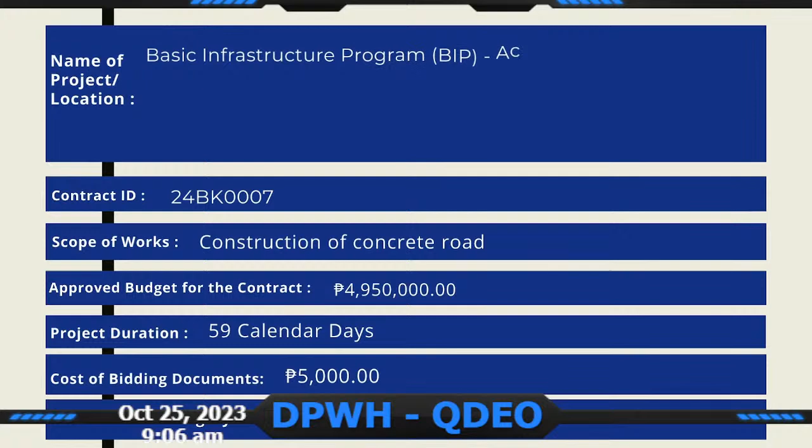Second project is BIP, construction of Nagabgaban Road, Barangay Nagabgaban, Aglipay, Quirino. Contract ID 24BK0007. Scope of works: construction of concrete road. Approved budget for the contract: 4,950,000 pesos. Project duration: 59 calendar days. Cost of bidding documents: 5,000 pesos. PCAB license category C&D, size range Small B.

Third project is BIP, construction of Macate Road, Barangay Macate, Diffun, Quirino. Contract ID 24BK0008. Scope of works: construction of concrete road. Approved budget for the contract: 4,950,000 pesos. Project duration: 64 calendar days. Cost of bidding documents: 5,000 pesos. PCAB license category C&D, size range Small B.

Fourth project is BIP construction of Del Pilar Road, Barangay Del Pilar, Cabarroguis, Quirino. Contract ID 24BK0009. Scope of works: construction of concrete road. Approved budget for the contract: 4,950,000 pesos. Contract duration: 78 calendar days. Cost of bidding documents: 5,000 pesos. PCAB license category C&D, size range Small B.

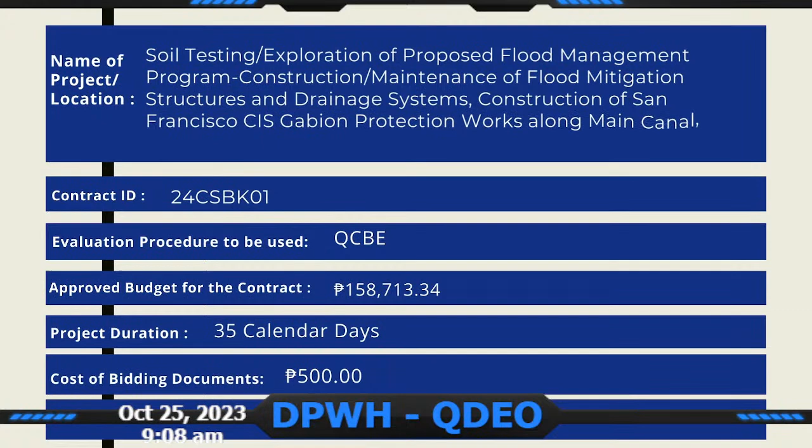First consulting services is soil testing exploration of proposed flood management program, construction maintenance of flood mitigation structures and drainage systems, construction of San Francisco CIS gabion protection works along Main Canal, San Francisco, Aglipay, Quirino. Contract ID 24CSBK01. Evaluation procedure to be used: QCBE. Approved budget for the contract: 158,713 pesos and 34 centavos.

Project duration: 35 calendar days. Cost of bidding documents: 500 pesos. Passing score for the technical evaluation: 80 points.

Second project is soil testing and exploration of the proposed flood management program: construction and rehabilitation of flood mitigation facilities within major river basins and principal rivers, specifically construction of Cagayan River flood control, Manglad section, Manglad, Maddela, Quirino. Contract ID 24CSBK02. Evaluation procedure: QCBE. Approved budget for the contract: 158,713 pesos and 34 centavos. Project duration: 35 calendar days. Cost of bidding documents: 500 pesos. Passing score for the technical evaluation: 80 points.

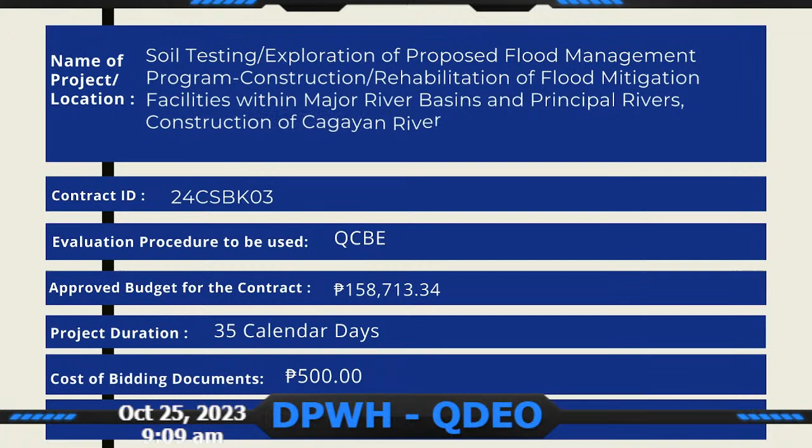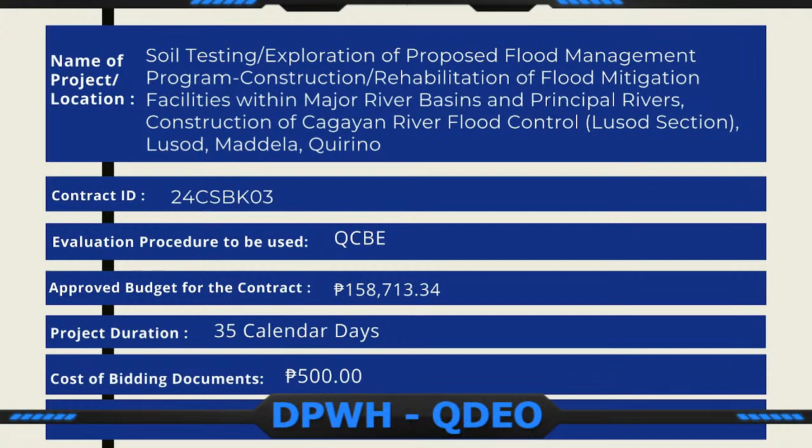Third project is soil testing and exploration of the proposed flood management program: construction and rehabilitation of flood mitigation facilities within major river basins and principal rivers, specifically construction of Cagayan River flood control, Lusod section, Lusod, Maddela, Quirino. Contract ID 24CSBK03. Evaluation procedure: QCBE. Approved budget for the contract: 158,713 pesos and 34 centavos. Project duration: 35 calendar days. Cost of bidding documents: 500 pesos. Passing score for the technical evaluation: 80 points.

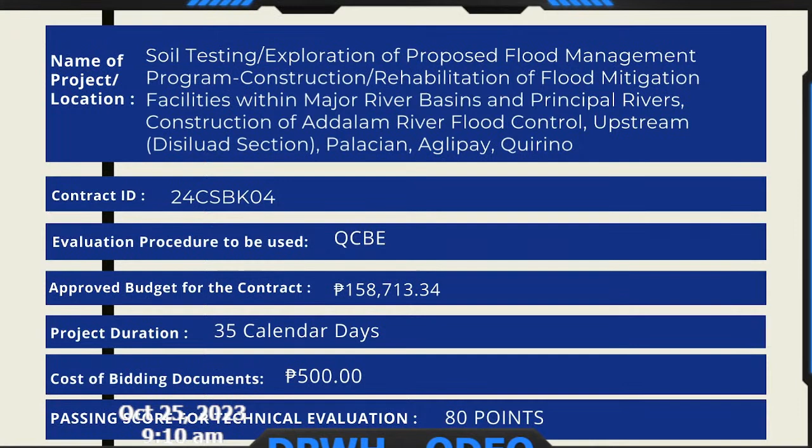Fourth project is soil testing exploration of the proposed flood management program, construction and rehabilitation of flood mitigation facilities within major river basins and principal rivers: construction of Addalam River flood control, upstream, Disiluad section, Palacian, Aglipay, Quirino. Contract ID 24CSBK04. Evaluation procedure: QCBE. Approved budget for the contract: 158,713 pesos and 34 centavos. Project duration: 35 calendar days. Cost of bidding documents: 500 pesos. Passing score for the technical evaluation: 80 points.

Fifth project is soil testing exploration of the proposed flood management program, construction and rehabilitation of flood mitigation facilities within major river basins and principal rivers: construction of Addalam River flood control downstream, Pinaripad Sur, Aglipay, Quirino. Contract ID 24CSBK05. Evaluation procedure: QCBE. Approved budget for the contract: 158,713 pesos and 34 centavos. Project duration: 35 calendar days. Cost of bidding documents: 500 pesos. Passing score for the technical evaluation: 80 points.

Sixth project is soil testing exploration of the proposed flood management program, construction and rehabilitation of flood mitigation facilities within major river basins and principal rivers: construction of Addalam River flood control downstream, Disiluad section, Palacian, Aglipay, Quirino. Contract ID 24CSBK06. Evaluation procedure: QCBE. Approved budget for the contract: 158,713 pesos and 34 centavos. Project duration: 35 calendar days. Cost of bidding documents: 500 pesos. Passing score for the technical evaluation: 80 points.

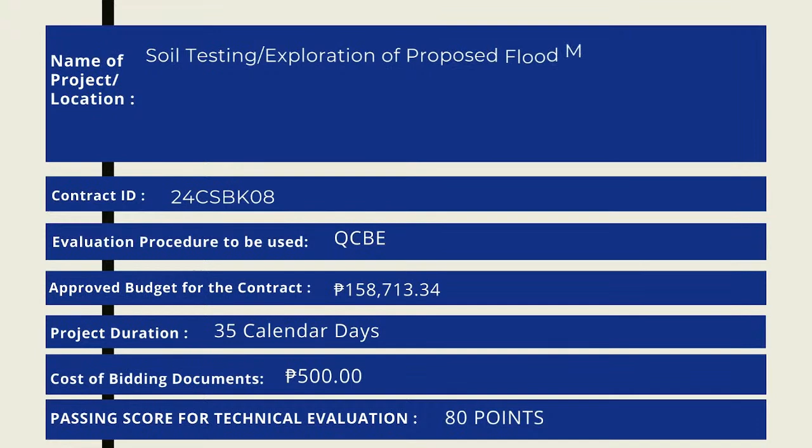Eighth project is soil testing exploration of the proposed flood management program, construction and rehabilitation of flood mitigation facilities within major river basins and principal rivers: construction along Cagayan River, Sangbay River, Sangbay, Maddela, Quirino. Contract ID 24CSBK08. Evaluation procedure: QCBE. Approved budget for the contract: 158,713 pesos and 34 centavos. Project duration: 35 calendar days. Cost of bidding documents: 500 pesos. Passing score for the technical evaluation: 80 points.

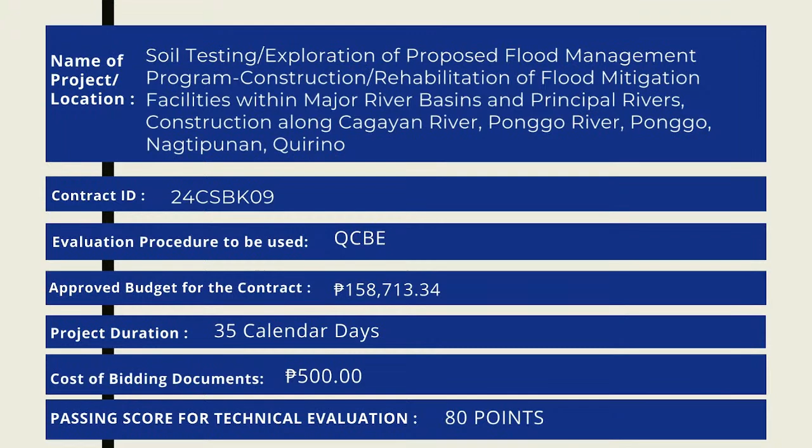Next project is soil testing exploration of the proposed flood management program, construction and rehabilitation of flood mitigation facilities within major river basins and principal rivers: construction along Cagayan River, Ponggo, Nagtipunan, Quirino. Contract ID 24CSBK09. Evaluation procedure: QCBE. Approved budget for the contract: 158,713 pesos and 34 centavos. Project duration: 35 calendar days. Cost of bidding documents: 500 pesos. Passing score for the technical evaluation: 80 points.

Last project is soil testing exploration of the proposed flood management program, construction and rehabilitation of flood mitigation facilities within major river basins and principal rivers: construction of Nalungtutan River control downstream along Cagayan River, San Dioniso II, Nagtipunan, Quirino. Contract ID 24CSBK10. Evaluation procedure: QCBE. Approved budget for the contract: 158,713 pesos and 34 centavos. Project duration: 35 calendar days. Cost of bidding documents: 500 pesos. Passing score for the technical evaluation: 80 points.

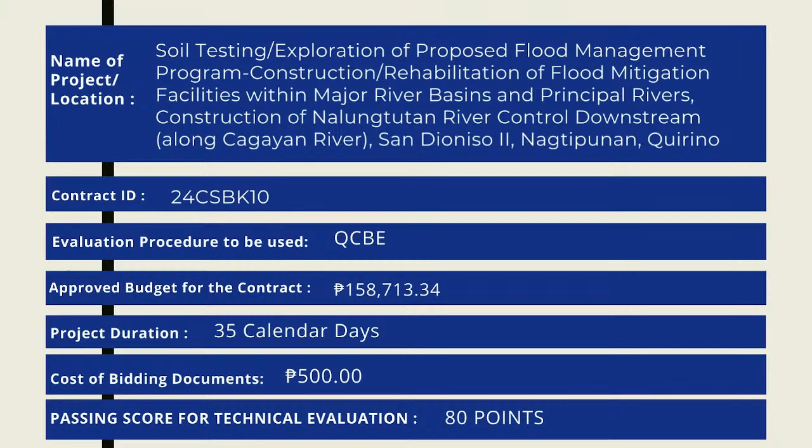This pre-bid conference is to discuss, clarify, and explain, among other things, the eligibility requirements and the technical and financial components of the contract to be bid, including questions and clarifications raised by prospective bidders before and during the conference. It is conducted not earlier than 7 calendar days from the posting of the invitation to bid, and at least 12 calendar days before the deadline of submission of bids.

A supplemental or bid bulletin is issued to answer questions or requests for clarification or interpretation, and upon the BAC's initiative to clarify or modify any provisions of the bidding documents. It is posted on the PhilGEPS and DPWH websites and on our bulletin board at least 7 calendar days before the deadline of bid submission. It is the duty of prospective bidders to always check the websites for any issued bulletins.

In the receipt and opening of bids, bids submitted should be on the date and time, and either at its physical address or through online submission as specified in the advertisement, through a single stage two-envelope system. Bids should be valid for a period not exceeding 120 calendar days from the date of the opening of bids.

The first envelope must contain the eligibility requirements and the technical component, and the second envelope must contain the financial component. In the sealing and marking of bids, enclose the original eligibility and technical documents in one sealed envelope marked original technical component, and the other original financial component in another sealed envelope marked original financial component.

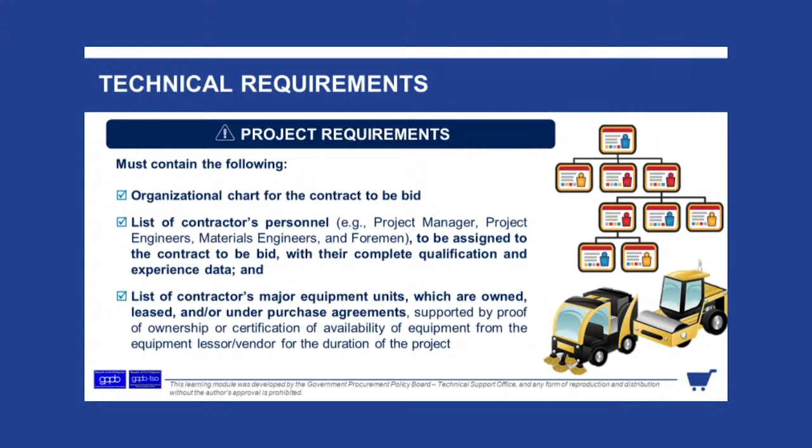For the revised Omnibus Sworn Statement form, Statement number 3 was revised and Statement number 10 was added, which states that in case advance payment was made or given, failure to perform or deliver any of the obligations and undertakings in the contract shall be sufficient ground to constitute criminal liability for swindling or the commission of fraud with unfaithfulness or abuse of confidence through misappropriating or converting any payment received by a person or entity under an obligation involving the duty to deliver certain goods or services, to the prejudice of the public and the government of the Philippines, pursuant to Article 315 of Act Number 3815, Series of 1930, as amended, or the Revised Penal Code.

For the contents of the second envelope, first is the financial bid form, including bid prices and bill of quantities, as well as applicable price schedules and other documents required in the bidding documents.

In the detailed evaluation of bids, its purpose is to determine the lowest calculated bid by establishing correct calculated prices of bids and ranking calculated total bid prices from lowest to highest. A non-discretionary criterion shall be used, which shall include consideration of completeness of bids and minor arithmetical corrections. Results shall be contained in the abstract of bids as calculated.

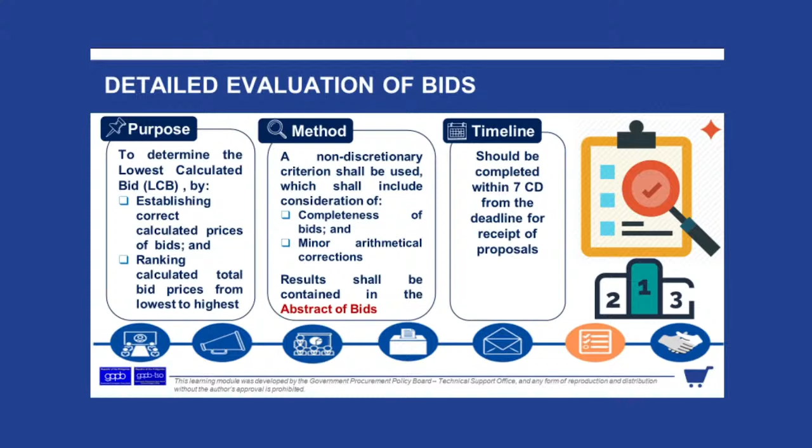Placing no price is considered as non-responsive, while specifying a zero or dash means it is offered for free.

In case of discrepancies: bid price in figures versus bid price in words, bid price in words shall prevail. Total price per item versus unit price for the item multiplied by its quantity, the latter shall prevail. Stated total price versus the actual sum of prices of component items, the latter shall prevail. Unit cost in the detailed estimate versus unit cost in the bill of quantities, the former shall prevail. No-contact rule means prohibition on communication with bidders from bid evaluation until award of the contract.

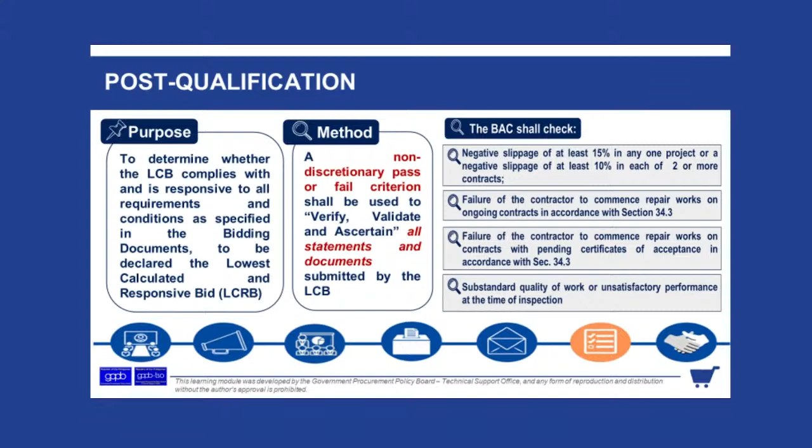In the conduct of post-qualification, its purpose is to determine whether the lowest calculated bid complies with and is responsive to all requirements and conditions as specified in the bidding documents, to be declared the lowest calculated and responsive bid. A non-discretionary pass or fail criterion shall be used to verify, validate, and ascertain all statements and documents submitted by the lowest calculated bid.

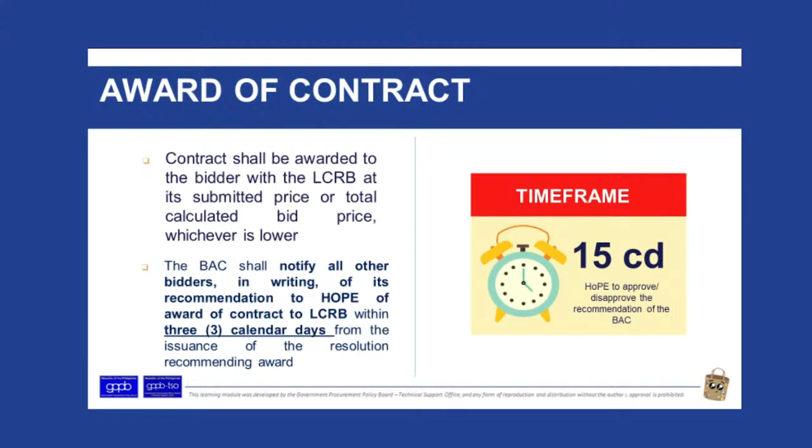For the award of contract, it shall be awarded to the bidder with the lowest calculated responsive bid, at its submitted price or total calculated bid price, whichever is lower. The BAC shall notify all other bidders of its recommendation to the Head of Procuring Entity for award of contract to the LCRB within 3 calendar days from the issuance of the resolution recommending award. The Head of Procuring Entity shall have at most 15 calendar days to decide whether or not to approve or disapprove said recommendation.

For consulting services, the same procedure will be done. Only the financial envelope of bidders who were rated pass in their technical evaluation will be opened.

For the contents of the technical and financial proposals: the first envelope, or the technical proposal, must contain the technical proposal submission form, bid security, description of organization and outline of recent experience, list of ongoing and completed projects under government or private contracts, comments and suggestions on the terms of reference, approach, work plan and schedule, organizational chart of key and support staff indicating their tasks, list of key personnel with their curriculum vitae, time schedule, work plan, and the Omnibus Sworn Statement.

For the financial proposal, it must contain the financial proposal submission form, summary of cost, breakdown of price per activity, breakdown of remuneration per activity, reimbursable per activity, and other items as may be required in the bidding documents.

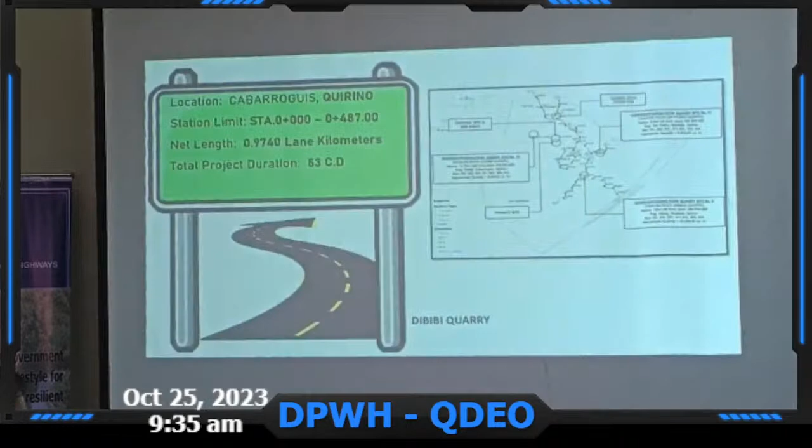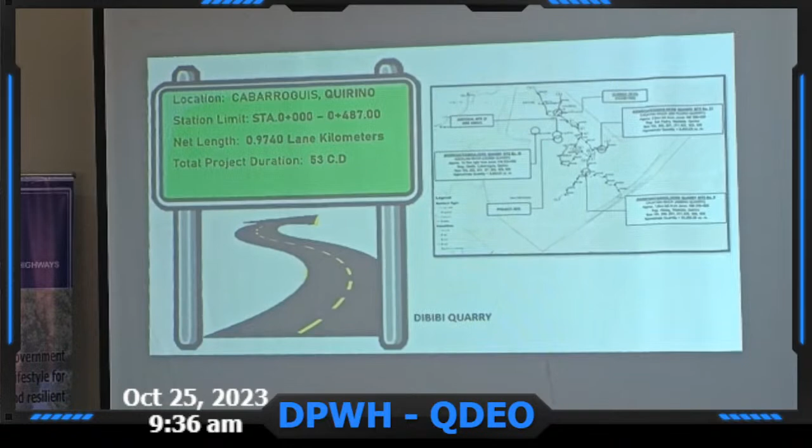Part B, project billboard signboard, for each. Occupational safety and health program, lump sum. The materials involved: safety helmet, safety shoes, safety vest, working gloves, face mask, rubber boots, eye goggles, and raincoats. For traffic management, lump sum. Mobilization, demobilization, lump sum. For the traffic management materials, it is advisable to use retro-reflective materials.

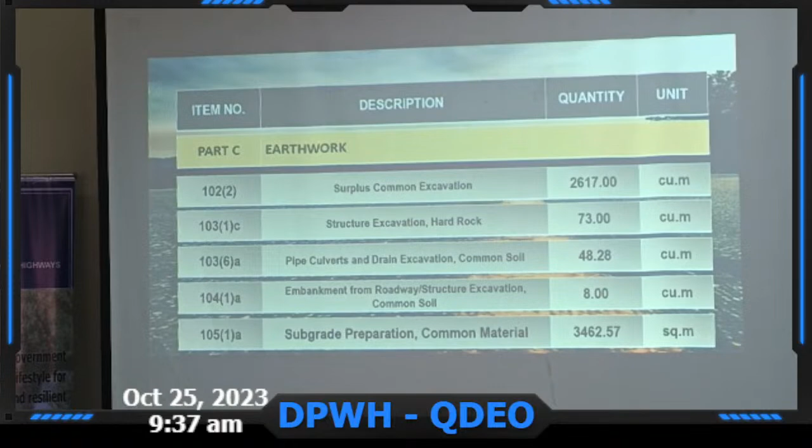For Part C, surplus common excavation, 2,617 cubic meter. For structure excavation, hard rock, 73 cubic meter. Pipe culverts and drain excavation, common soil, 48.28 cubic meter. Embankment from roadway, structure excavation, common soil, 8 cubic meter.

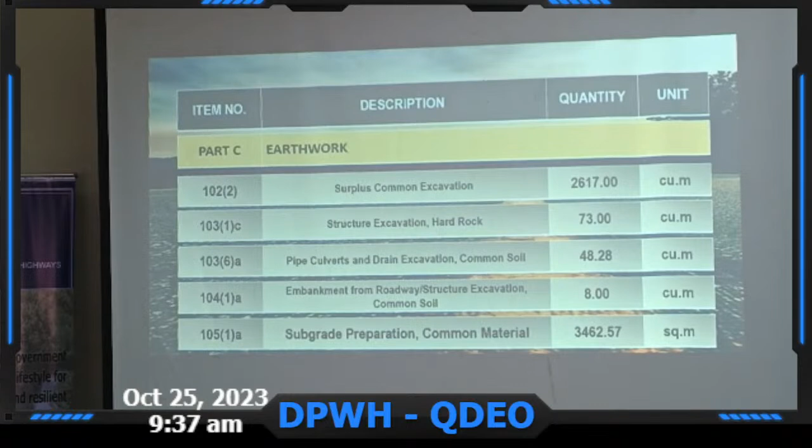Subgrade preparation, common material, 3,462.57 square meter. Part D, aggregate sub-base course, 497 cubic meter. For Part E, Portland cement concrete pavement, unreinforced, 0.23 meters thick at 14 days, 2,435 square meters.

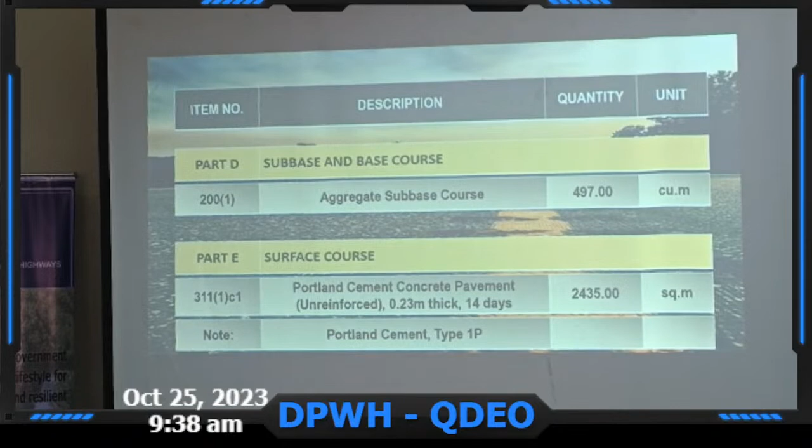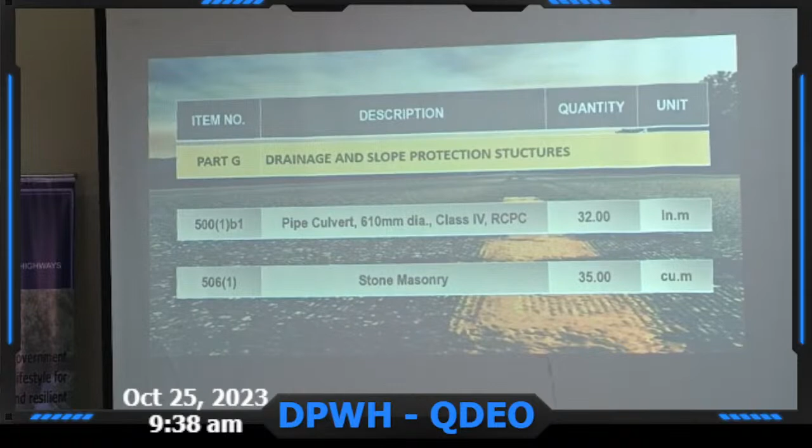The cement to be used is Portland cement type 1P for the PCCP. For Part G, pipe culvert 610 diameter, class 4 RCPC, 32 linear meter, and stone masonry of 35 cubic meters. That's all for the items for Dingasan.

Are there any questions?

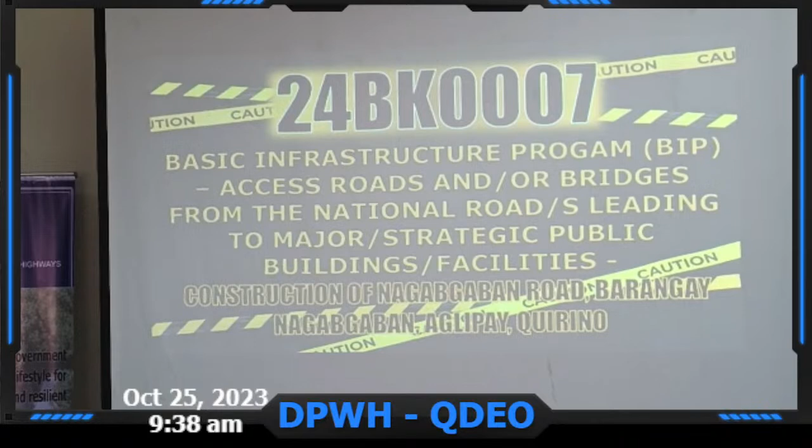Let's proceed to our next project, also a BIP, construction of Nagabgaban Road, Barangay Nagabgaban, Aglipay, Quirino, with a length of 400 meters, 59 calendar days.

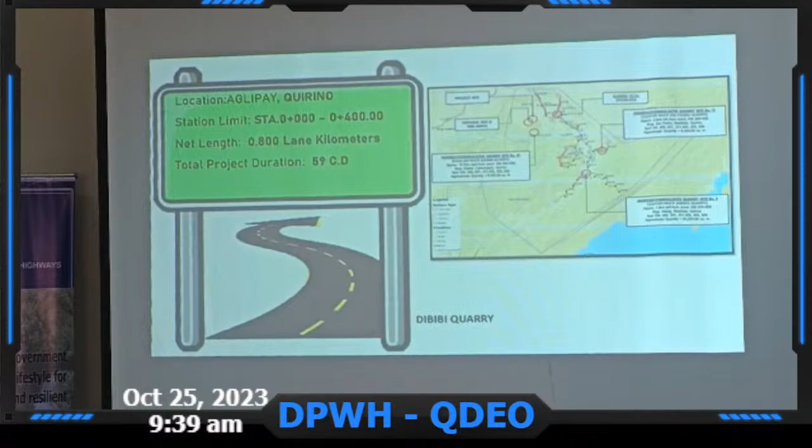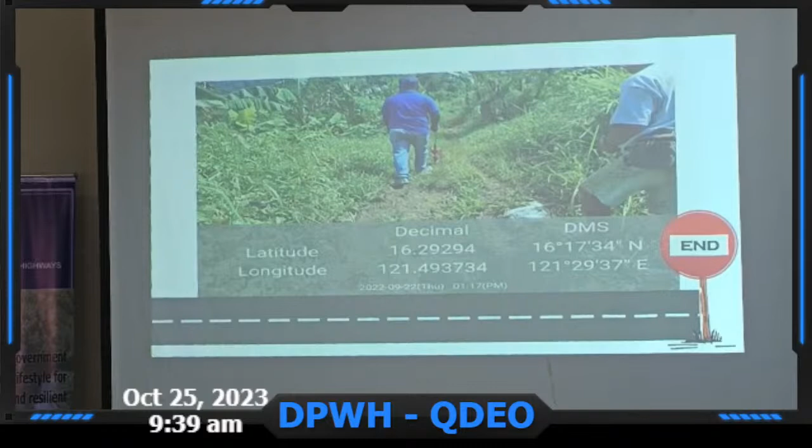Photos taken at the site, beginning of the project, end of project. For items and quantities involved, Part A, provision of progress photographs, 1.97 months.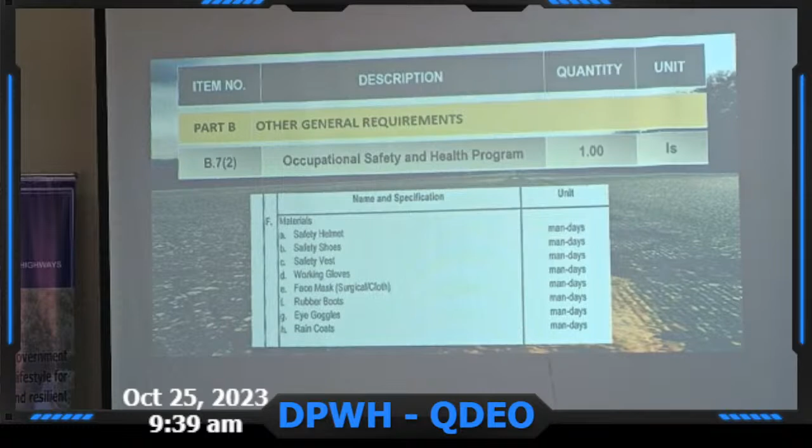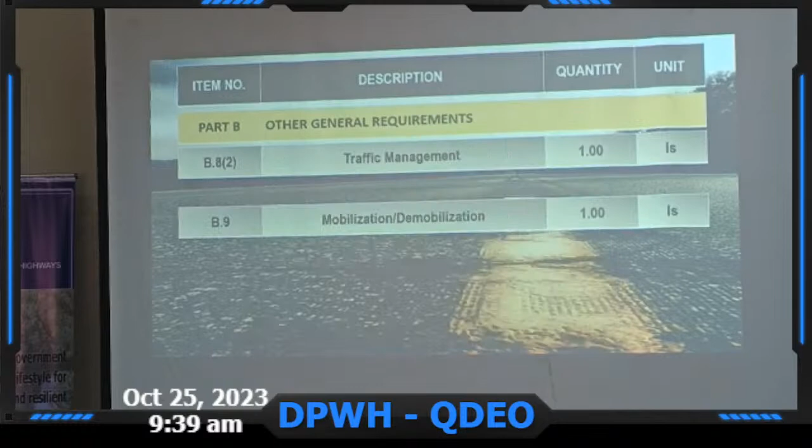Part B, project billboard, signboard, for each. Occupational safety and health program. For the materials: safety helmets, safety shoes, safety vests, working gloves, face masks, rubber boots, eye goggles, and raincoats. Traffic management, lump sum. Mobilization, demobilization, lump sum. For traffic management, materials to be used are retro-reflective, especially for the signages.

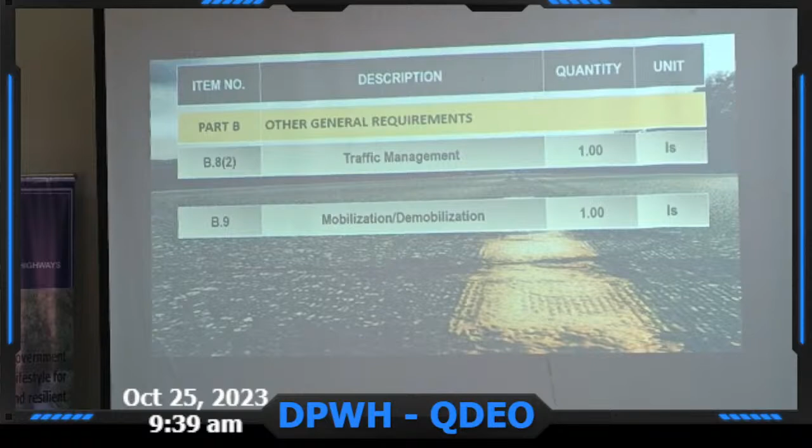For Part C, surplus common excavation, 1,520 cubic meter. Surplus rock excavation, soft, 196 cubic meter. Embankment from roadway, structure excavation, common soil, 78 cubic meter. Subgrade preparation, common material, 2,924 square meter. Part D, aggregate sub-base course, 408 cubic meter.

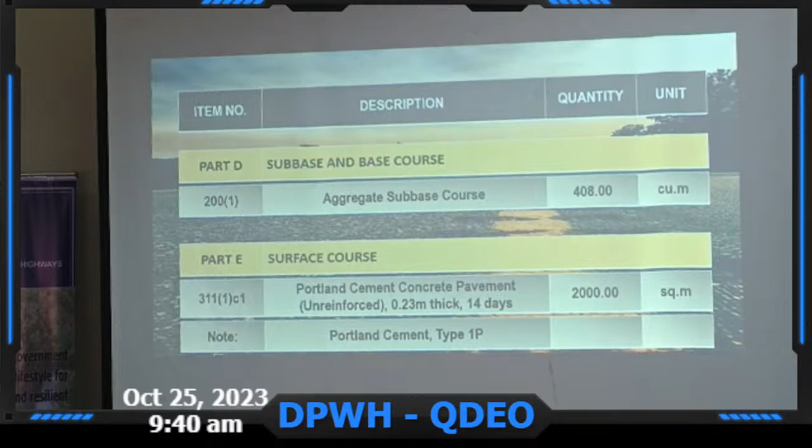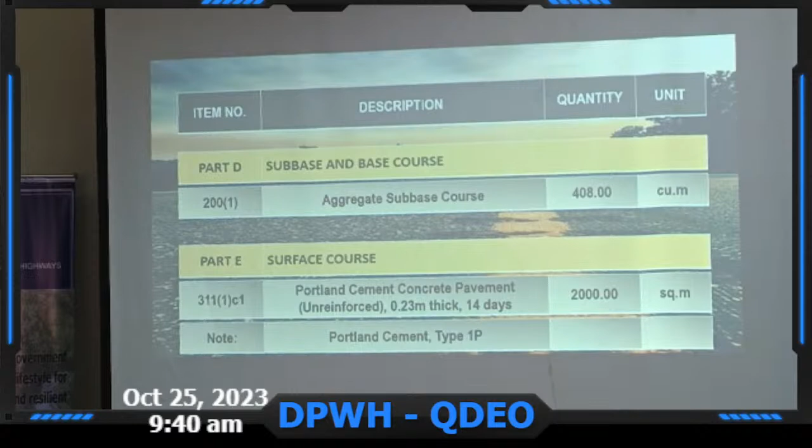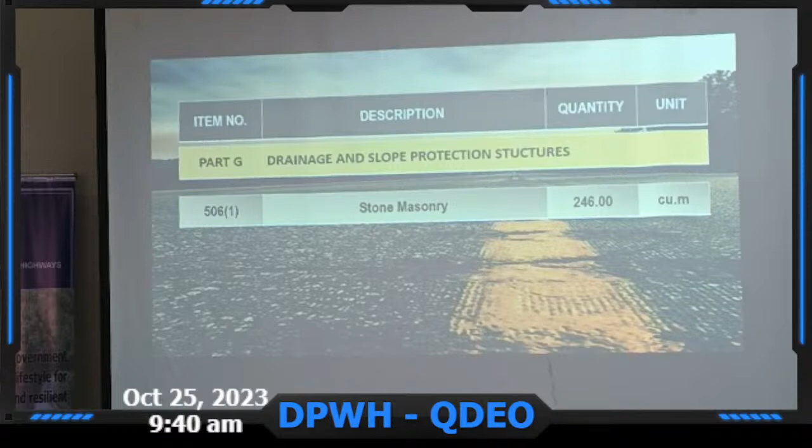For Part E, Portland cement concrete pavement, unreinforced, 0.23 meters thick at 14 days, 2,000 square meter. The cement to be used is Portland cement type 1P for the PCCP. For Part G, stone masonry of 246 cubic meter. These are all the items involved in the project of Nagabgaban.

Are there any questions concerning that project? Okay, let's proceed.

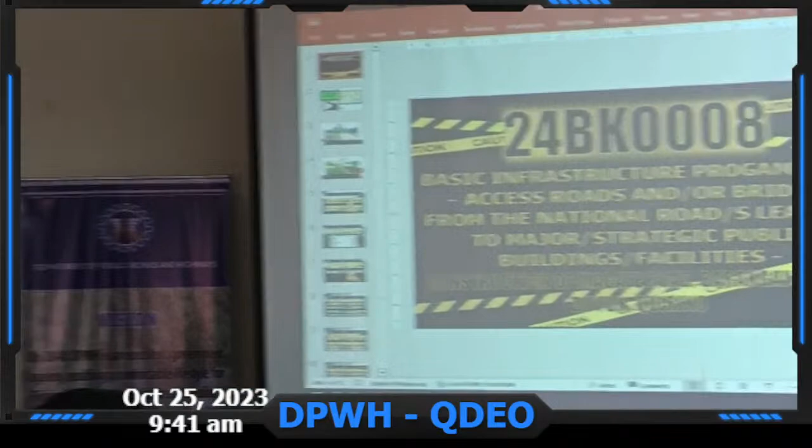For our next project, also a BIP, construction of Macate Road, Barangay Macate, Diffun, Quirino, with a total length of 259.5 meters, 64 calendar days.

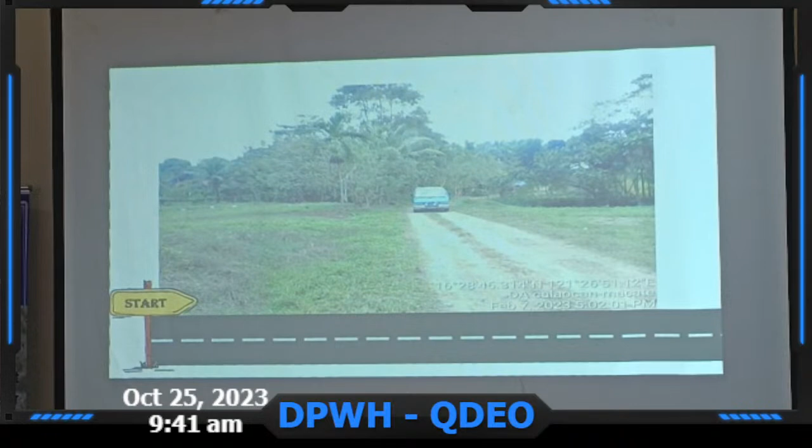Photos taken at the site, the start of the project, and end of the project. For items and quantities involved, Part A, provision of progress photographs, 2.13 months. Part B, project billboard signboard for each.

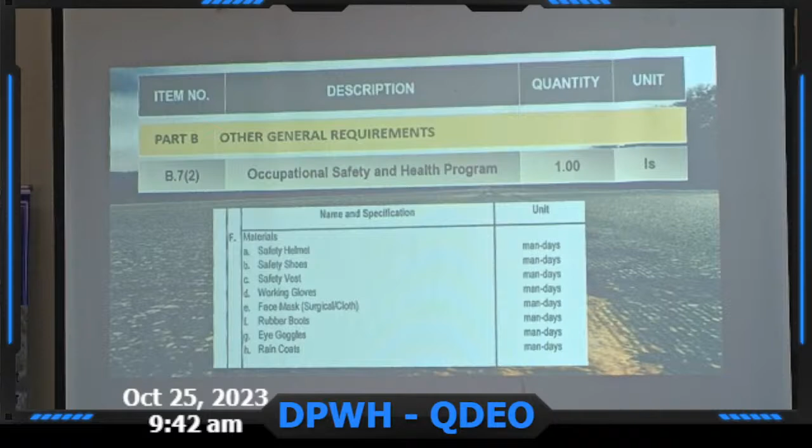Occupational safety and health program, 1 lump sum. For materials: safety helmet, safety shoes, safety vest, working gloves, face mask, rubber boots, eye goggles, and raincoats. Traffic management, lump sum, demobilization, lump sum. Also for traffic management, use retro-reflective material for the signages.

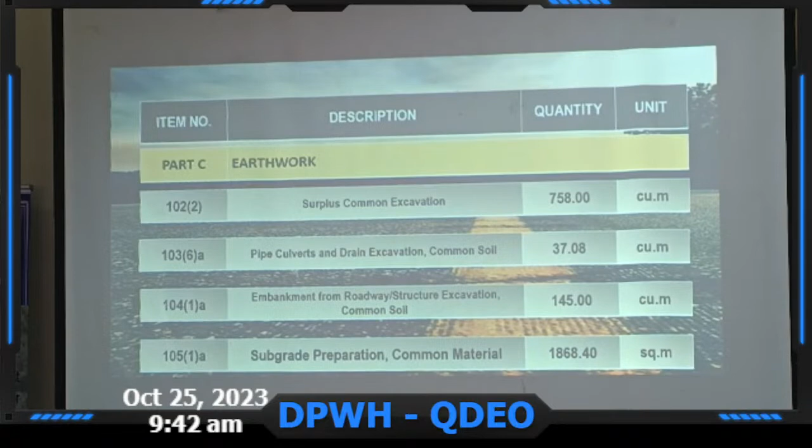For Part C, surplus common excavation, 758 cubic meter. Pipe culverts and drain excavation, common soil, 37.08 cubic meter. Embankment from roadway, structure excavation, common soil, 145 cubic meter. Subgrade preparation, common material, 1,868.4 square meter. For Part D, aggregate sub-base course, 457 cubic meter.

For Part E, surface course, Portland cement concrete pavement, unreinforced, 0.23 meters thick at 14 days, 1,297.5 square meter. The type of cement to be used is Portland cement type 1P for the PCCP.

For Part G, pipe culvert, 610 diameter, class 4 RCPC, 16 linear meter. And pipe culvert of 910 diameter, class 4 RCPC, 3 linear meter. We have a lined canal of stone masonry, 33 cubic meter, and stone masonry of slope protection, 283 cubic meter. This is all the items and quantities involved in the project of Macate.

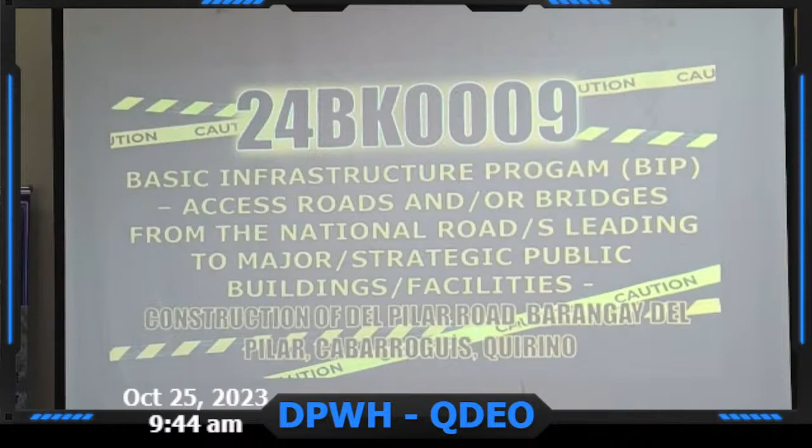For the last project for the roads, it's also a BIP, construction of Del Pilar Road, Barangay Del Pilar, Cabarroguis, Quirino, with a length of 352.9 meters, 78 calendar days.

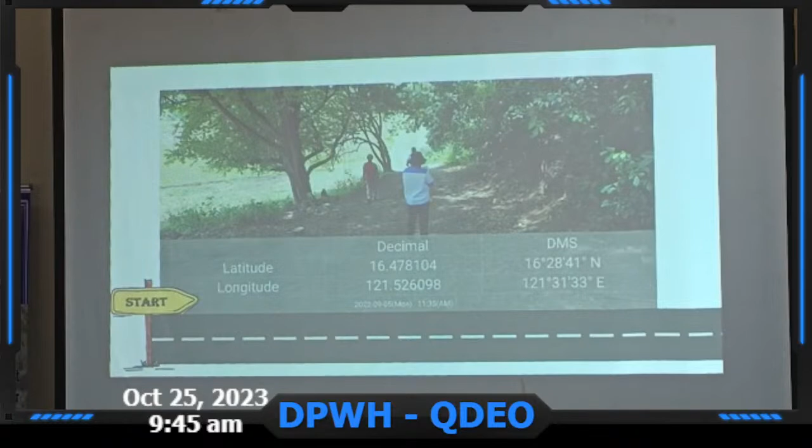Photos taken at the site, the beginning of the project, and end of the project. For the items and quantities involved, for Part A, provision of progress photographs, 2.6 months.

Part B, project billboard, signboard for each. Occupational safety and health program, lump sum. The materials are safety helmet, safety shoes, safety vest, working gloves, face mask, rubber boots, eye goggles, and raincoats.

For the traffic management, lump sum, mobilization, demobilization, lump sum. For the traffic management, use retro-reflective materials for the signages.

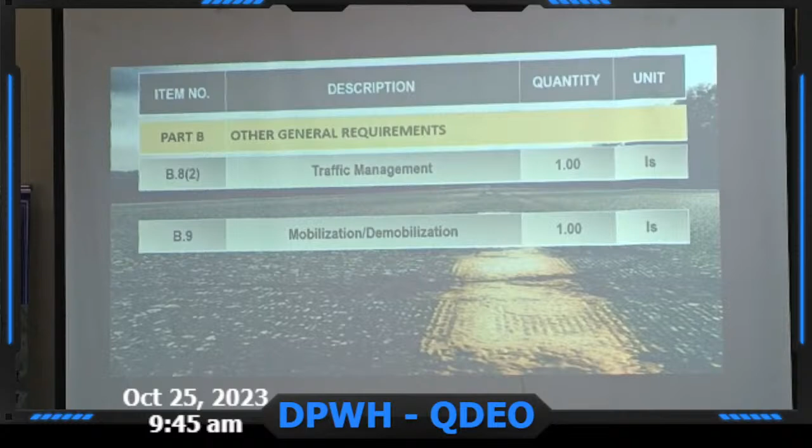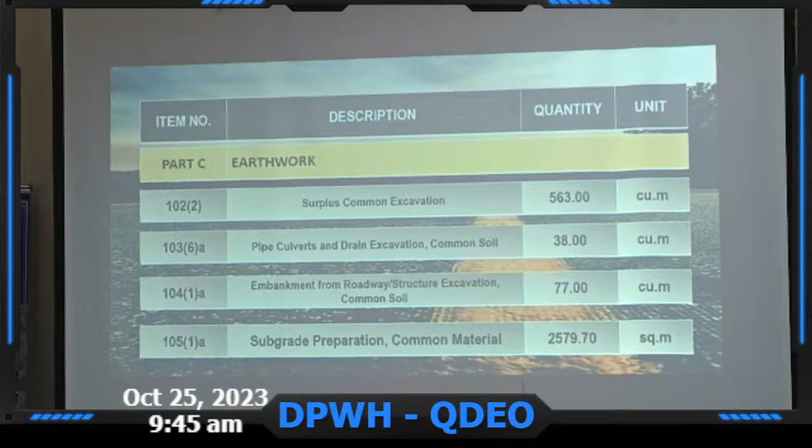For part C, surplus common excavation, 563 cubic meter. Pipe culverts and drain excavation, common soil, 38 cubic meter. Embankment from roadway, structure excavation, common soil, 77 cubic meter.

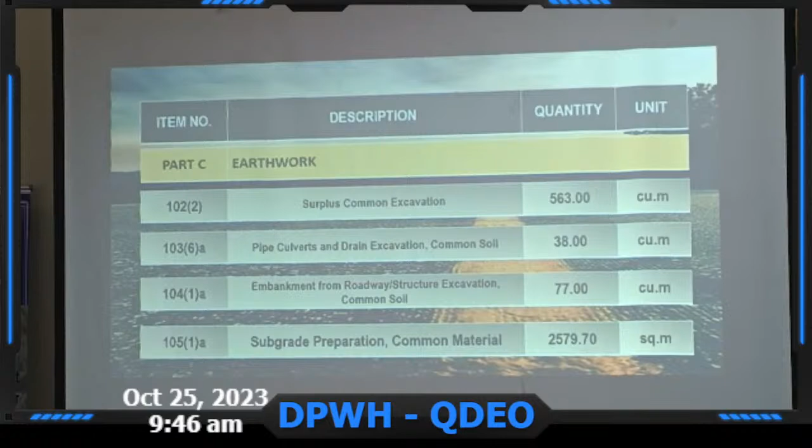And subgrade preparation, common material, 2,579.7 square meter. Part D, aggregate subbase course, 360 cubic meter.

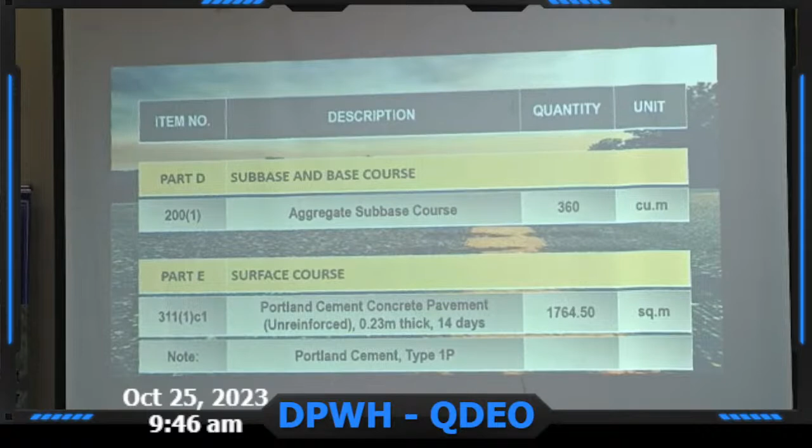And Part E, Portland cement concrete pavement, unreinforced, 0.23 meters thick at 14 days, 1,764.5 square meter. Use Portland cement type 1P for the PCCP.

Good morning. I want to discuss the consultancy services for subsurface exploration for flood control project.

First is 24 CSBK01, soil testing exploration of proposed flood management program, construction, rehabilitation of flood mitigation structure and drain system, construction of San Francisco CIS Gabion protection works along main canal San Francisco Aglipay Quirino with appropriation of 158,713.34.

Number 2 is CSBK 02, soil testing exploration of proposed flood management program, construction, rehabilitation of flood mitigation facilities within major river basins and principal rivers, construction of Cagayan River flood control, Manglad section, Manglad Maddela Quirino with appropriation of 158,713.34.

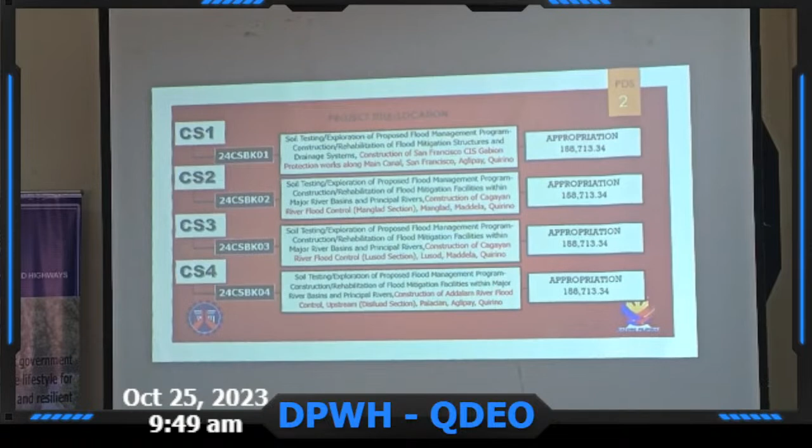Number 3, 24 CSBK 03, soil testing exploration of proposed flood management program, construction, rehabilitation of flood mitigation facilities within major river basins and principal rivers, construction of Cagayan River flood control, Lusod section, Lusod Maddela Quirino with appropriation of 158,713.34. Number 4 is 24 CSBK 04, soil testing exploration of proposed flood management program, construction, rehabilitation of flood mitigation facilities within major river basins and principal rivers, construction of Addalam River flood control upstream, Disilwad section, Palasian, Aglipay, Quirino with appropriation of 158,713.34.

Number 5 is 24 CSBK 05, soil testing exploration of proposed flood management program, construction, rehabilitation of flood mitigation facilities within major river basins and principal rivers, construction of Addalam River flood control, downstream, Pinaripad Sur section, Penaripad Sur, Aglipay, Quirino with appropriation of 158,713.34.

Number 6 is soil testing exploration of proposed flood management program, construction, rehabilitation of flood mitigation facilities within major river basins and principal rivers, construction of Addalam River flood control, downstream, Disilwad section, Palasian, Aglipay, Quirino with appropriation of 158,713.34. Number 7 is 24 CSBK 07,

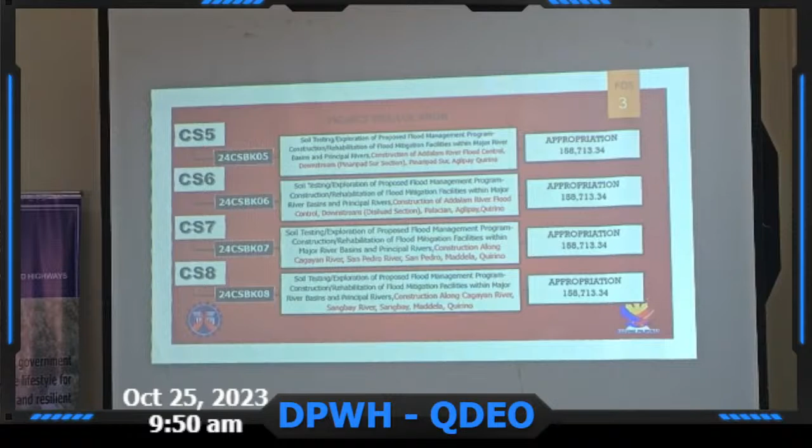Soil testing exploration of proposed flood management program, construction, rehabilitation of flood mitigation facilities within major river basins and principal rivers, construction along Cagayan River, San Pedro River, San Pedro, Maddela, Quirino, with appropriation 158,713.34. Number 8, 24 CSBK 08, soil testing exploration of proposed flood management program, construction, rehabilitation of flood mitigation facilities within major river basin, principal rivers, construction along Cagayan River, Sangbay River, Sangbay, Maddela, Quirino, with appropriation of 158,713.34.

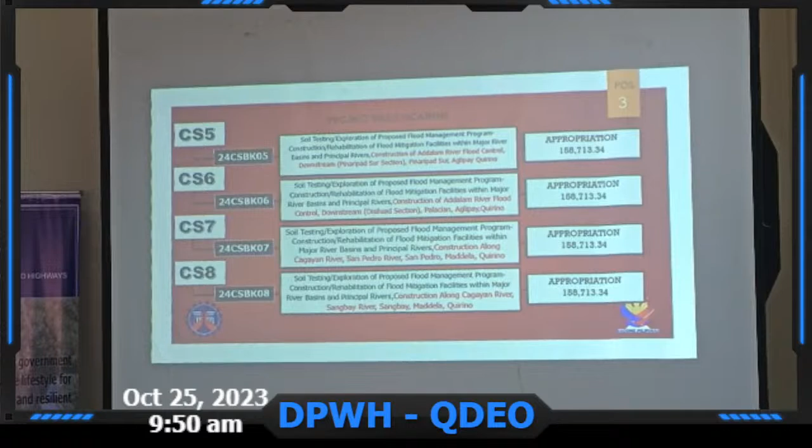Number 9 is soil testing exploration, 24 CSBK 09, soil testing exploration of proposed flood management program, construction, rehabilitation of flood mitigation facilities within major river basins and principal rivers, construction along Cagayan River, Pongo River, Pongo, Nagtipunan, Quirino, with appropriation of 158,713.34.

Number 10 is 24 CSBK 010, soil testing exploration of proposed flood management program, construction, rehabilitation of flood mitigation facilities within major river basins and principal rivers, construction of Nalungtutan River control downstream along Cagayan River, San Dionisio to Nagtipunan, Quirino, with appropriation of 158,713.34.

I will discuss the one typical term of reference, which is the same for all the flood control projects. Number 1, project description and purpose.

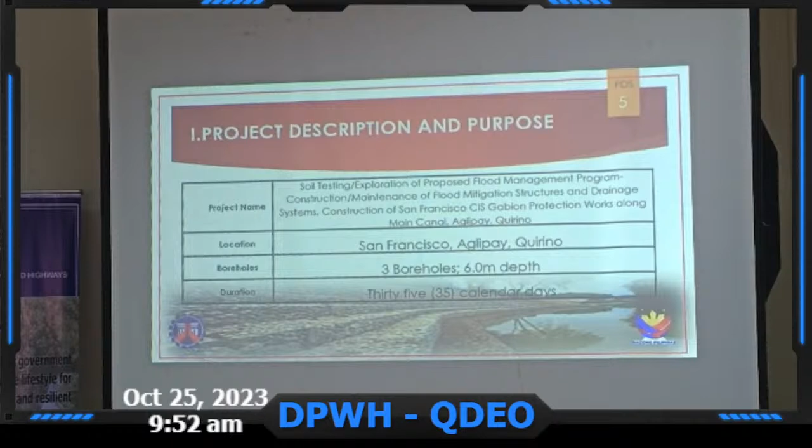Project name: soil testing exploration of proposed flood management program, construction, maintenance, flood mitigation structure and drainage system, construction of San Francisco CIS Gabion, protection works along main canal, Aglipay, Quirino. Location: San Francisco, Aglipay, Quirino. Boreholes: 3 boreholes with a minimum depth of 6 meters. Duration: 35 calendar days.

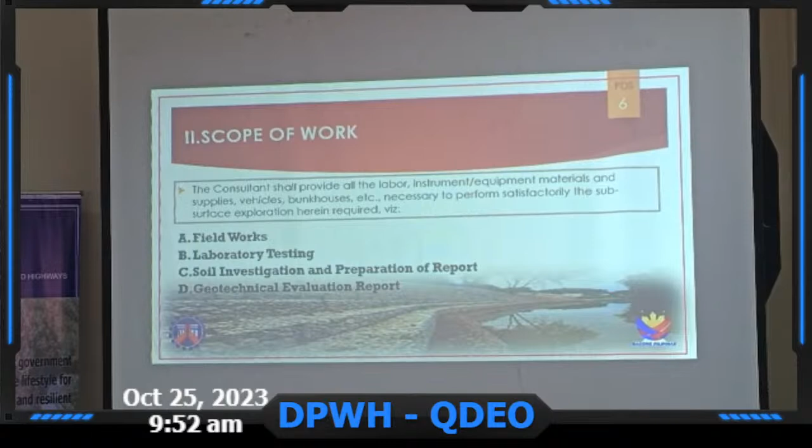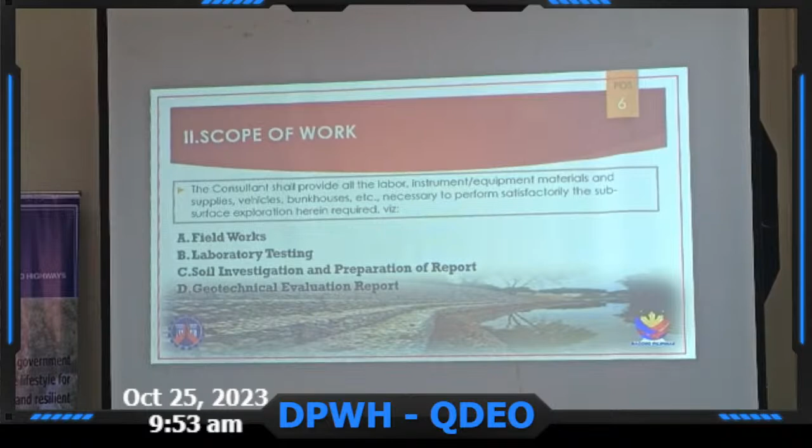Number 2, scope of work. The consultant shall provide all labor, instrument, equipment, materials, supplies, vehicles, bunkhouses, and others necessary to perform satisfactorily the subsurface exploration herein required: A. Field works, laboratory testing, soil investigation and preparation of report, and D. Geotechnical evaluation report.

Number 3, detailed exploration required specification. Field works, borehole location. The geotechnical investigation shall also include a geotechnical assessment of the site with at least 3 boreholes at the location of the proposed project. Additional boreholes shall be drilled when there is a significant difference between adjacent boreholes in areas where subsurface condition is complex or variable. This shall be made upon the instruction of the geotechnical engineer.

Borehole depth: if the foundation type has not been specified, boring shall be carried out to a minimum depth of 6 meters in ordinary soil, or 3 meters into sound rock if rock is encountered above that depth. In case bearing capacity is not encountered beyond 6 meters, boring shall be continued until the preferred layer is encountered, upon the instruction of the geotechnical engineer.

Procedure, letter A: deep drilling with standard penetration test shall be conducted inside the perimeter of the proposed project. Minimum depth shall be determined based on confirmation of hard strata or bedrock. Drilling can be stopped after 3 meters minimum penetration into hard strata or bedrock.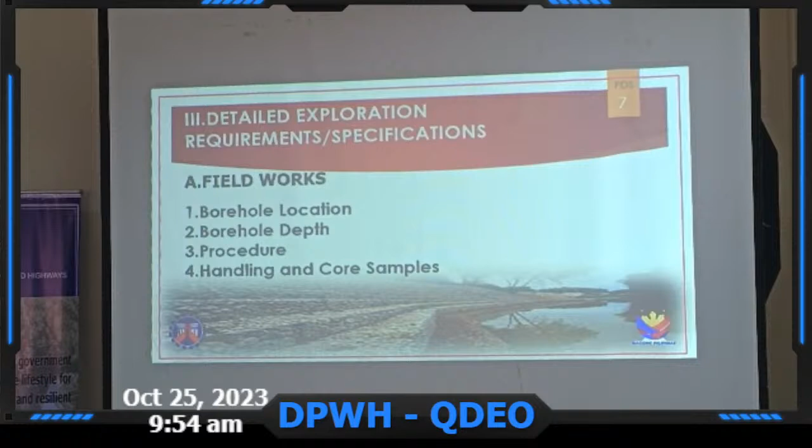B. The consultant shall perform analysis and testing on disturbed and undisturbed samples, in accordance with AASHTO and ASTM standards. C. The soil samples for foundation design shall be tested for determination of the main characteristics, such as grain size distribution and classification, moisture content, Atterberg limits, and others.

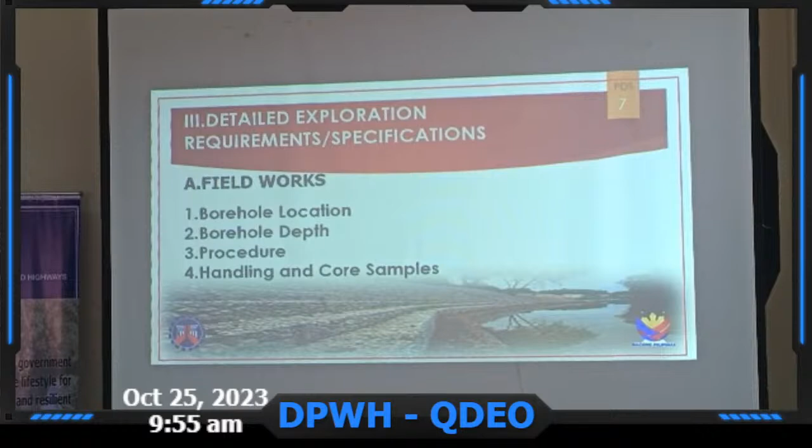Letter D: submit design recommendations for foundation, condition scheme, bearing capacity and settlement, groundwater table, hydraulic influences, excavation stability, seismic design consideration, and liquefaction potential. Letter E: geological structure, especially active faults which might traverse the area, should be delineated, and potential mass movement areas should be identified. Analysis for liquefaction potential during earthquake and consolidation due to soft grounds should be included.

Number 4, handling and core samples. The contractor shall provide all the materials, equipment, and labor necessary for preserving the samples.

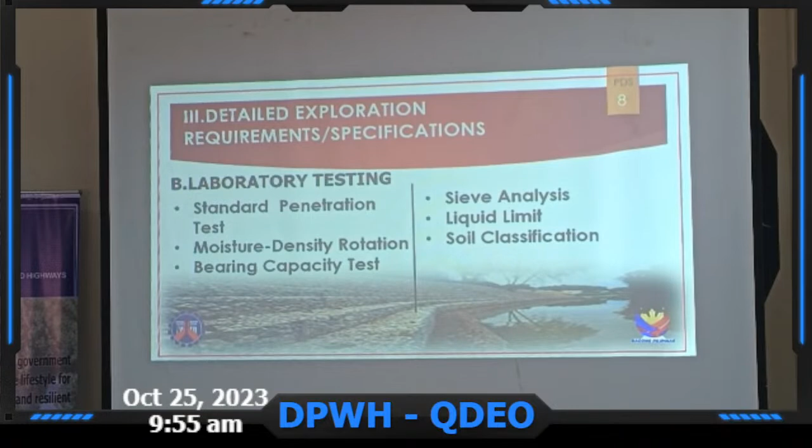Letter B, laboratory testing: the preparation of samples for testing shall be made in accordance with ASTM. The following tests shall be made for samples obtained from boring and drilling: 1. Standard penetration test. 2. Moisture density relation. 3. Bearing capacity test. 4. Sieve analysis. 5. Liquid limit. 6. Soil classification.

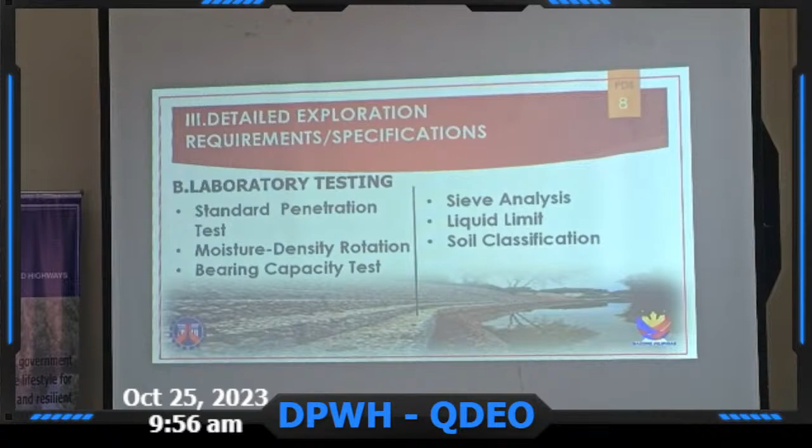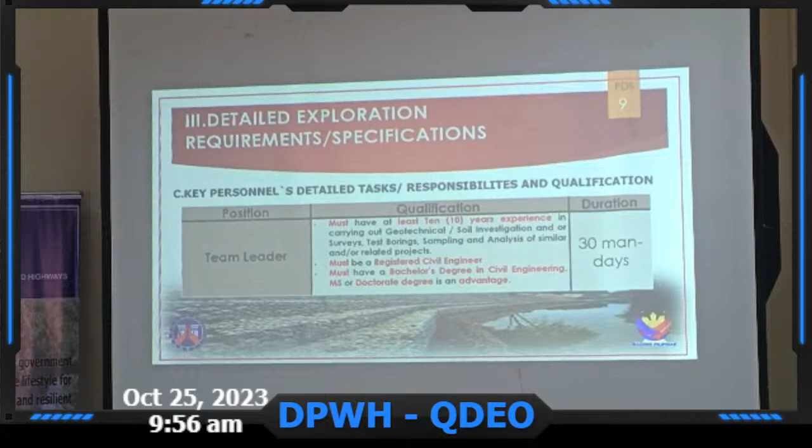Key personnel's detailed tasks, responsibilities, and qualifications. For the team leader: must have at least 10 years experience in carrying out geotechnical soil investigation and survey, test boring, sample analysis, or similar related projects. Must be a registered civil engineer, must have a bachelor's degree in civil engineering; MS or doctorate degree is an advantage.

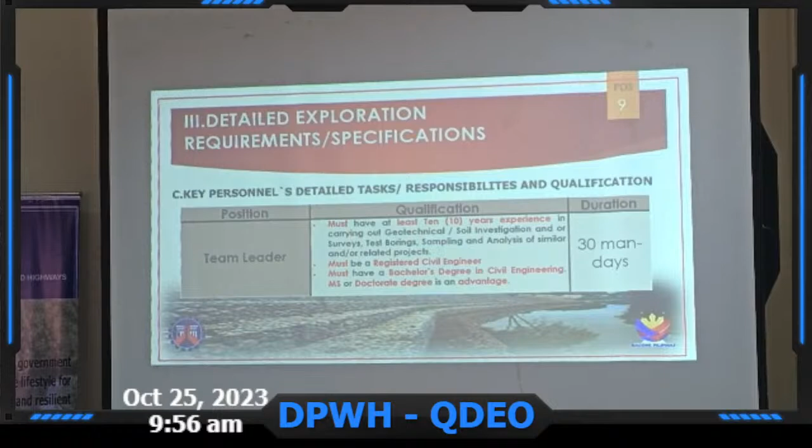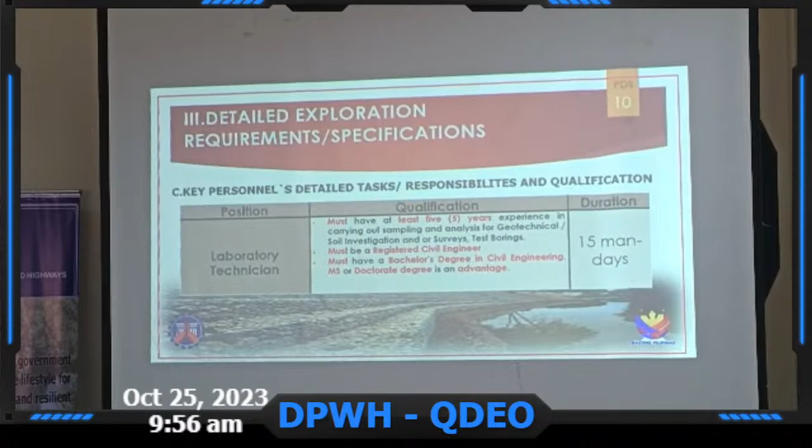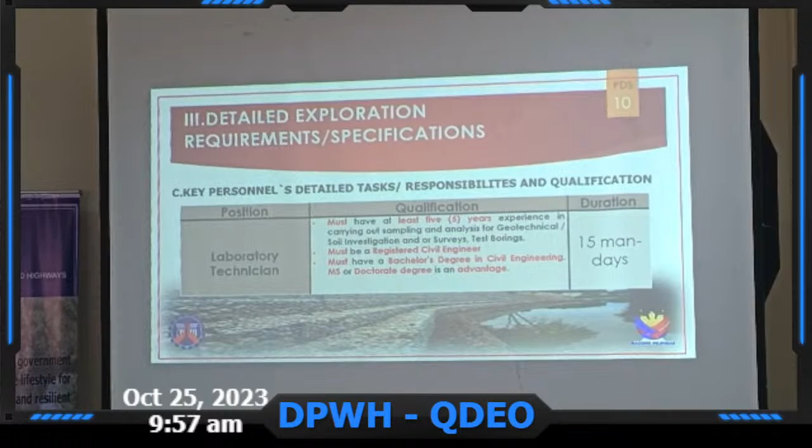For laboratory technician: must have at least 5 years experience in carrying out sampling and analysis for geotechnical soil investigation and surveys, test boring. Must be a registered civil engineer, must have a bachelor's degree in civil engineering; master's or doctorate degree is an advantage.

Detailed tasks and responsibilities of key personnel. Team leader: 1. Overall guidance, direction, supervision, and coordination of team members. 2. Collection and evaluation of geological information on the project site. 3. Study and determination of items and methods of soil investigation and laboratory tests. 4. Perform necessary subsoil investigation on representative sections of the road, with samples taken at suitable intervals. 5. Investigate the physical properties of materials to facilitate the design of structures.

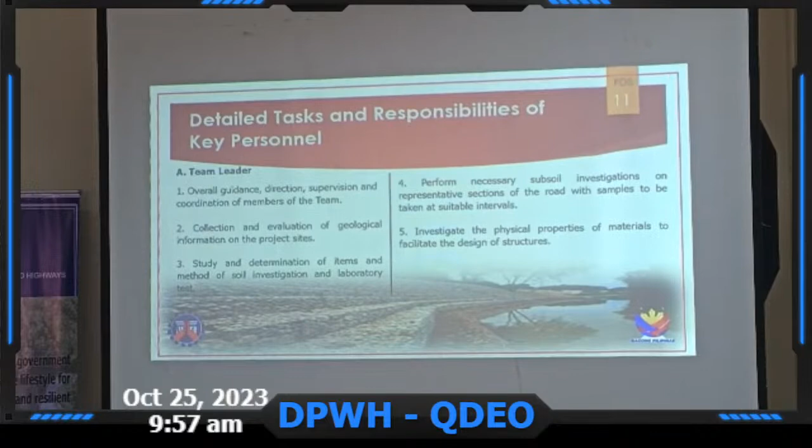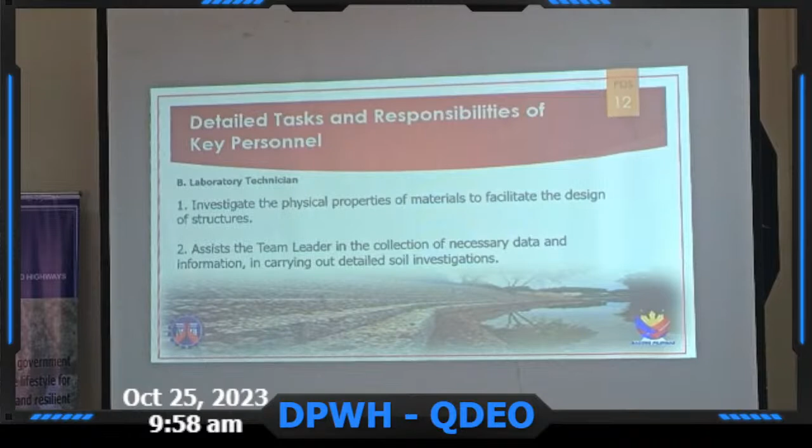For laboratory technician: investigate the physical properties of material to facilitate the design of structures. 2. Assist the team leader in the collection of necessary data and information in carrying out detailed soil investigations.

Letter D, reports and deliverables. The consultant shall prepare the following reports and deliverables. Inception report: the consultant is required to submit this 1 week after commencement of services. It shall outline a detailed work program and briefly describe the methodology and project schedule to meet the terms of reference. The report shall include initial findings as well as preliminary layout of forms used for various investigations and calculations. The inception report shall be submitted in softbound copy with the title of the report written on the spine.

Number 2, final report. The consultant is required to submit the final report 35 calendar days from commencement of work, in 4 bound copies, to the DPWH Quirino District Engineering Office, Cabarroguis, Quirino. Other data to be submitted: A, boring logs, and B, photographs.

Number 4, payment. There should be no advance payment for consultancy. The final payment shall be made only after the final report and a statement identified as such shall have been submitted by the consultant and approved as satisfactory by the procuring entity.

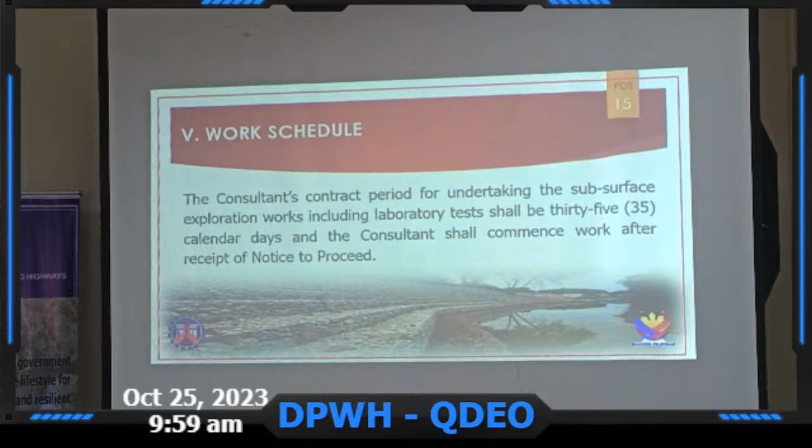Number 5, work schedule. The consultant's contract period for undertaking the subsurface exploration works, including laboratory tests, shall be 35 calendar days, and the consultant shall commence work after receipt of notice to proceed. That's all, thank you.

Geotag pictures, sir.

Any ways forward? Any other matters regarding the previously presented presentation? Any question, madam? So there is no question. Any announcement from the back?

For the information of everyone, on October 31, 2023, 9 a.m., we have a scheduled pre-bid conference for 3 civil works and opening of bids for 7 civil works. That's all, Mr. Chairman, thank you.